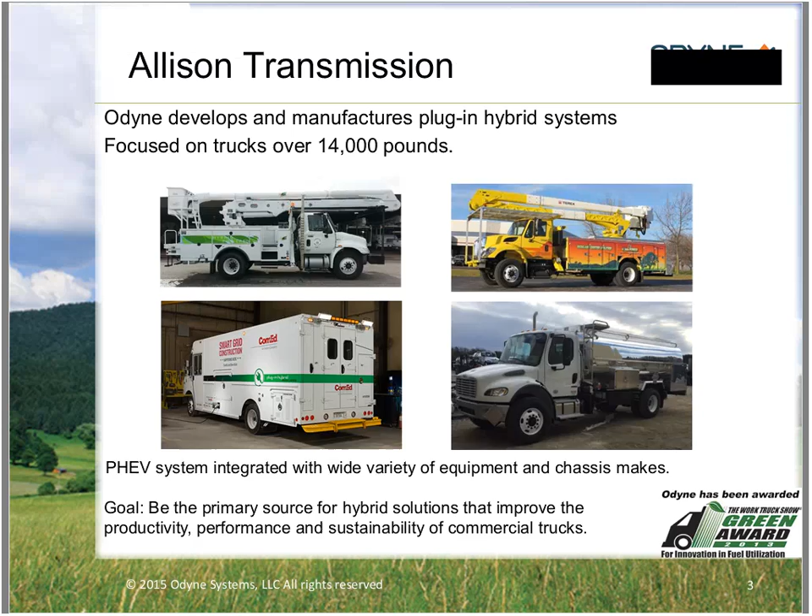Odyne Systems has a partnership with Allison Transmission. Allison Transmission is the world's largest manufacturer of fully automatic transmissions for medium and heavy-duty commercial vehicles. So those who are familiar with them, all the fully automatic transmissions in commercial work vehicles are very familiar with Allison. They partially own Odyne through a non-controlling equity investment, and we integrate our plug-in hybrid solution with the existing powertrains through a very minimally intrusive design that I'll go over with you today. With Allison, we do have a collaboration with them on engineering and marketing to work together to develop these products, and we are exclusively approved by Allison Transmission to globally provide the plug-in hybrid solution on their 1000, 2000, 3000, and 4000 series transmissions.

This slide here just shows the Odyne design with our minimally intrusive setup. So what you're looking at is an Allison transmission towards the left of the slide with our plug-in hybrid solution mounted from the power takeoff. So that Allison transmission we take from a commercial vehicle and integrate into the existing platform. From the power takeoff, we provide an electric motor, which is a traction motor, the Remy HVH250, which provides launch assist and regenerative braking while driving to improve the fuel economy of that vehicle.

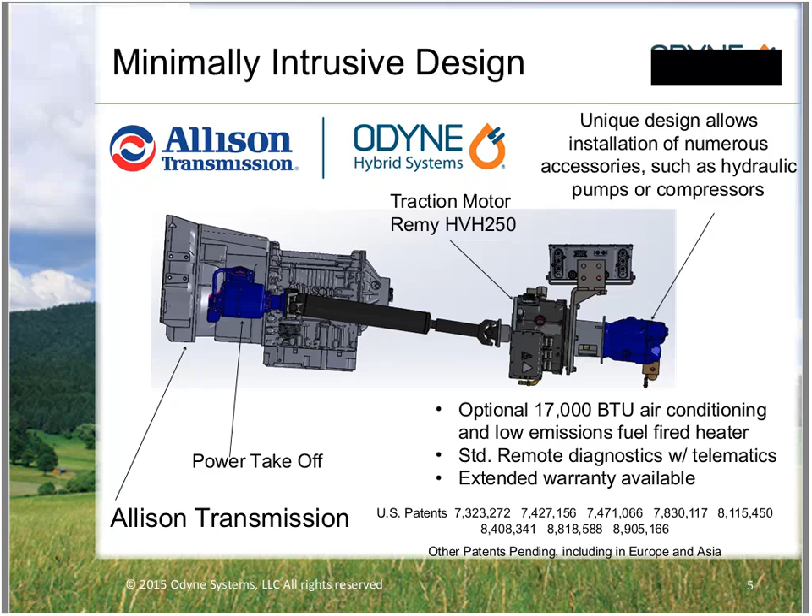This is showing the Odyne manufacturing process. We are an intermediate stage manufacturer, and here are a couple of pictures of our assembly facility. We'll take an OEM chassis, whether it's a Ford, Freightliner, Freightliner custom chassis, or Kenworth International platform, and integrate our plug-in hybrid solution to that vehicle.

With our platform, we'll take that existing chassis and integrate the components you see on the slide, adding either a single battery pack option or a dual battery pack. The single battery pack is a 14.4 kilowatt-hour solution that adds 1,200 pounds to the vehicle. The larger two battery pack solution provides 28.8 kilowatt-hours and adds 1,800 pounds. This vehicle at our manufacturing facility is upgraded and integrated.

You can see the picture there. At this one facility, we installed over 120 systems in 2014, and it's very scalable so we can do this around the country. We have facilities in Wisconsin and California currently that do the system upgrades for us, and we're looking to expand as the volume dictates.

Again, you can manufacture or add these to a wide choice of chassis and engines. We work with different chassis OEMs that interface with the Allison transmission, and also multiple engine platforms from Cummins, Navistar, MaxxForce, and Detroit Diesel.

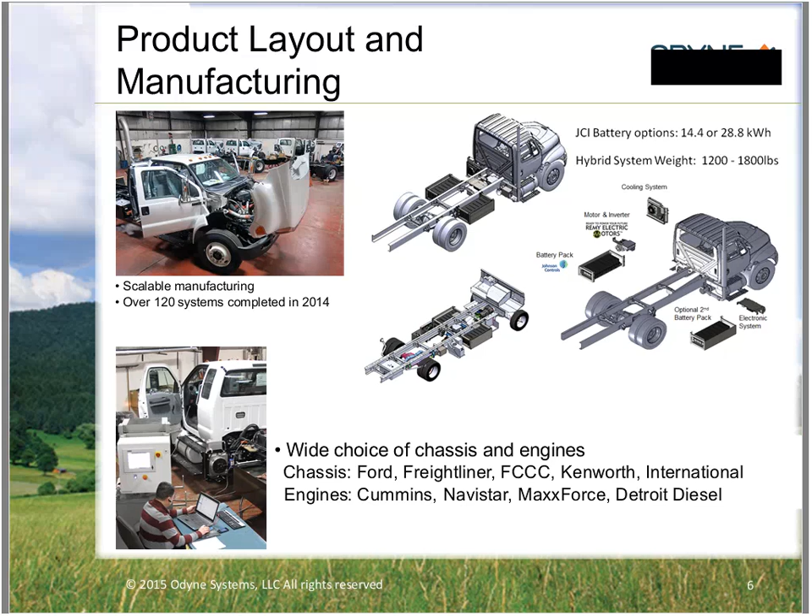Odyne is one of the leaders in plug-in hybrid systems for the commercial truck market around North America. We've been fortunate to receive multiple awards and projects over the last couple of years, the largest being a DOE and EPRI program where we deployed approximately 120 vehicles around the country and into Canada with our plug-in hybrid solution.

We also received programs in California from the California Energy Commission, two different programs, and one program partner is Pacific Gas and Electric. They are just receiving their first two Odyne plug-in hybrid systems on digger derrick applications, which will be deployed this month into their fleet to see those fuel savings firsthand.

We've also worked with the South Coast Air Quality Management District in the Los Angeles area for two projects, and with the DOD for deployment of a plug-in hybrid vehicle at Pearl Harbor. So you can see we've been able to deploy our technology throughout North America.

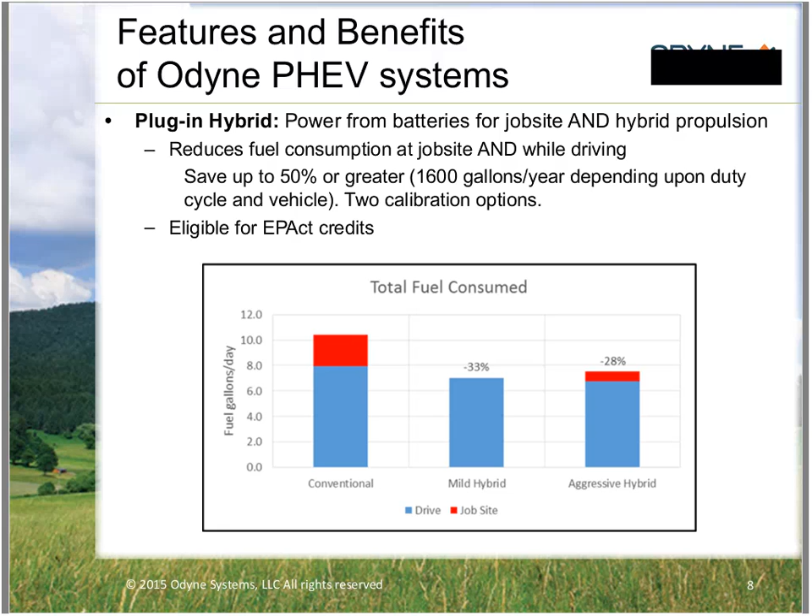This next slide shows that in addition to fuel savings, we see significantly lower emissions compared to a diesel-powered vehicle when you add the Odyne plug-in hybrid solution. This breaks down the CO2, the THC, and the NOx across different slides showing those benefits.

You can see the CO2 reduction just by consuming less diesel fuel - there's a significant reduction in CO2. But the biggest benefit comes from the NOx and THC. As you can see, the majority of that emissions from our dyno testing was produced at the work site while the vehicle was stationary, and there are significant reductions in both NOx and THC when you integrate an Odyne plug-in hybrid solution.

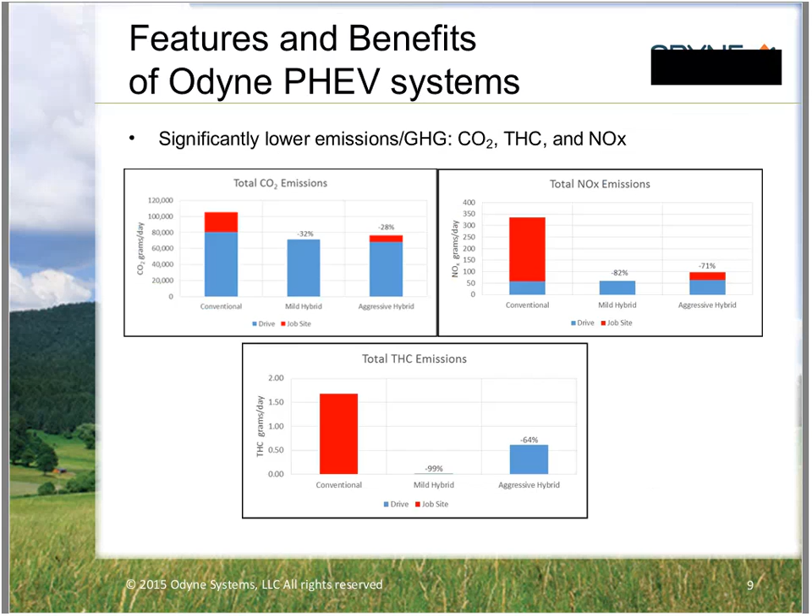Additional features and benefits of the Odyne system: we provide one of the largest battery systems with our application, over 25 kilowatt hours of usable energy, which provides a nice quiet work site and keeps the engine off longer than a smaller battery pack option. This all-electric work site also reduces engine maintenance due to lower idle time, so less wear and tear on the engine, less frequent oil changes, and other benefits of not having to idle the truck for that extended period at the work site.

Our battery packs are built for extreme conditions. As you saw from that map, we have vehicles into Canada and down into Arizona in real warm climates, and they are built for those extreme conditions. They are thermally managed, liquid cooled and heated, and IP67 rated, so they're submersible and built for an automotive, real truck environment. Those battery packs have a 4-year warranty direct from Johnson Controls, and are designed to last 10 years.

We also provide one of the largest electric motors, with 42 kilowatts of continuous power, 70 kW peak, which provides much better acceleration and can power much larger loads, like digger derricks that we were doing for Pacific Gas and Electric to be able to power and dig those holes fully electric.

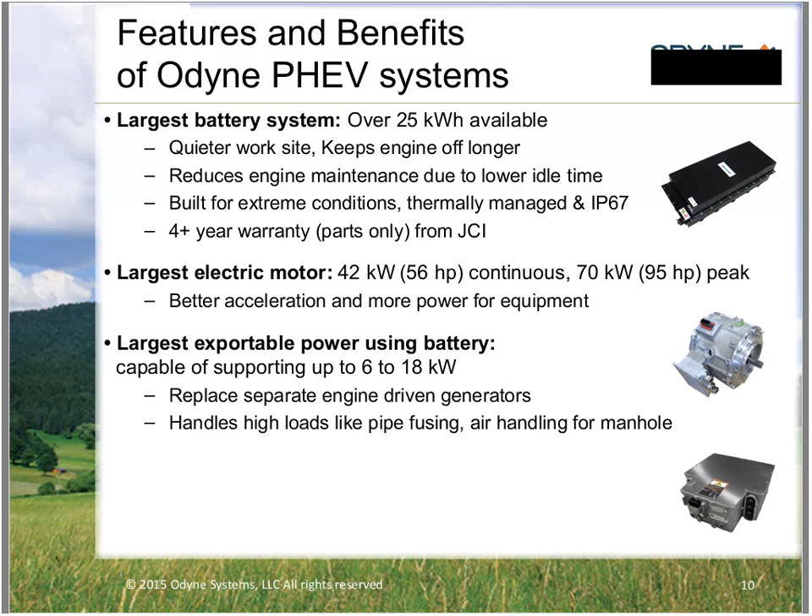We also offer one of the largest exportable power solutions available, varying anywhere from 6 to 18 kilowatts. That would replace a separate diesel generator that you'd have on your vehicle, providing a nice solution where you don't have to bring along a diesel generator, and provides additional fuel savings without having that generator on board.

For the work trucks here, I want to go through a couple examples of what we provide and the solutions we're seeing in the field. You can see there's a wide variety of applications we've deployed, from bucket trucks working with Altec, Terex, Versalift, used to maintain overhead lines, to cranes and digger derrick applications for installing poles and transformers and heavy lifting, and underground utility vehicle applications like that hybrid walk-in van and compressor truck, which provide underground infrastructure maintenance for electrical and natural gas lines.

Our newest application is a fuel tank truck for Duke Energy, which will actually deliver diesel and gasoline fuel to vehicles and do that fully electric at the work site instead of being powered by the diesel engine.

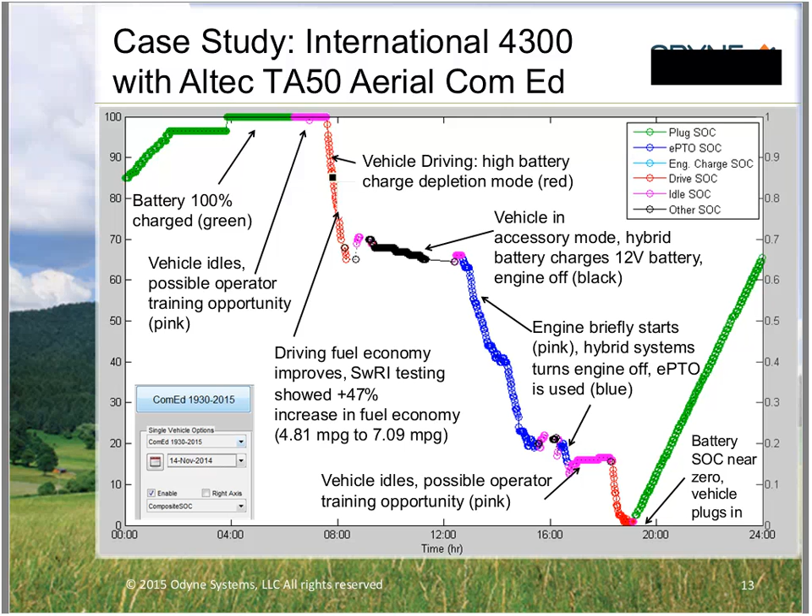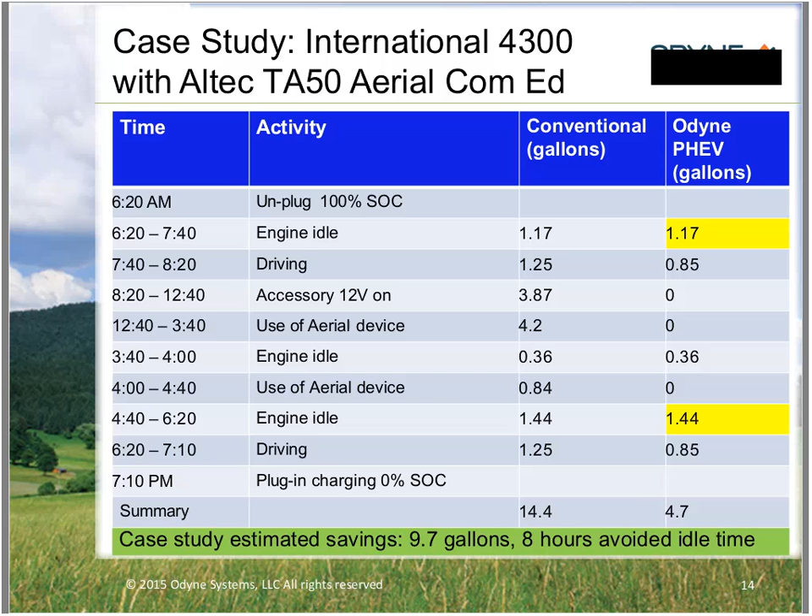That's just one day, one example of a bucket truck application. What that correlates to is this chart showing a conventional diesel-powered vehicle equivalent versus an Odyne plug-in hybrid vehicle, and the amount of fuel consumed with our plug-in hybrid system versus a diesel-powered vehicle. You can see there's almost 10 gallons of savings and 8 hours of avoided idle time just for that one day of operation. I have one more example I want to show you quickly.

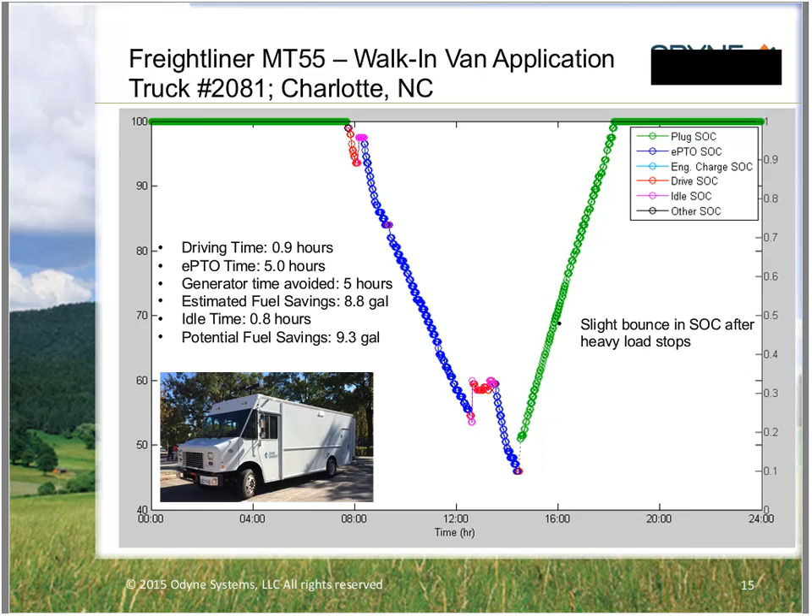So just in summary, the Odyne solution reduces fuel consumption, lowers emissions, improves the vehicle performance, provides a nice quiet work site for the crews, and lower operating and engine maintenance cost.

The plug-in Odyne solution is defined as a true plug-in hybrid solution by the U.S. government and is eligible for EPAct credits. It uses all the current safety criteria from the SAE standard plug-in charging and high voltage interlock loop. It uses the same charge station that a Chevy Volt or Nissan Leaf uses, and has a nice warranty acknowledged by Allison Transmission, and a nice battery warranty of over 4 years.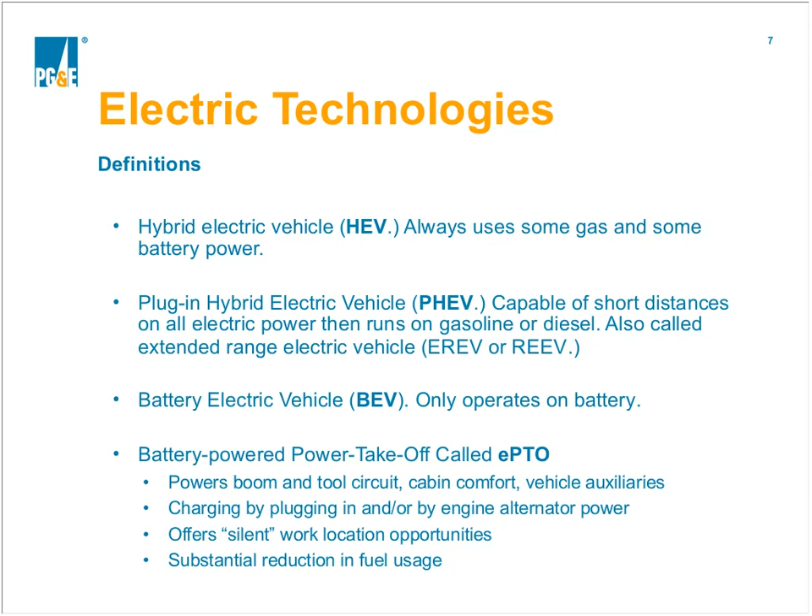One of the most important factors, unique to the utility sector, is that our linemen and troublemen who go out every day operating in and around large cities and neighborhoods can work silently to replace transformers and intermediate circuits, which provides a substantial safety factor. Normally they communicate with hand-arm signals due to loud, idling diesel engines, but now, in an electric ePTO kind of environment, they can talk just as normally as I'm talking to you today. This affords a great safety factor when dealing with large amounts of electricity while making repairs for the customer.

So why electrification, and why is the time now? There are obvious reasons and not-so-obvious reasons, and everyone who joins the electrification effort does it for different reasons—whether it's national security, transfer of wealth, or reducing the money we send overseas, maybe a trillion dollars each year, to foreign lands that may or may not like our way of life. Either way, there are a lot of reasons why we think the time is now.

From a financial standpoint, the compound annual growth rate for fuel, in terms of volatility, is about 7.5% over 15 years. Many of you probably remember that about two months ago, everyone enjoyed filling up their gas tanks for $2.50 or less per gallon at Costco or the local cheapest option. But now, at the nearest gas station, prices have jumped up considerably in just the past couple of months. That volatility is ever-present, and it's a clear example of why the time is now.

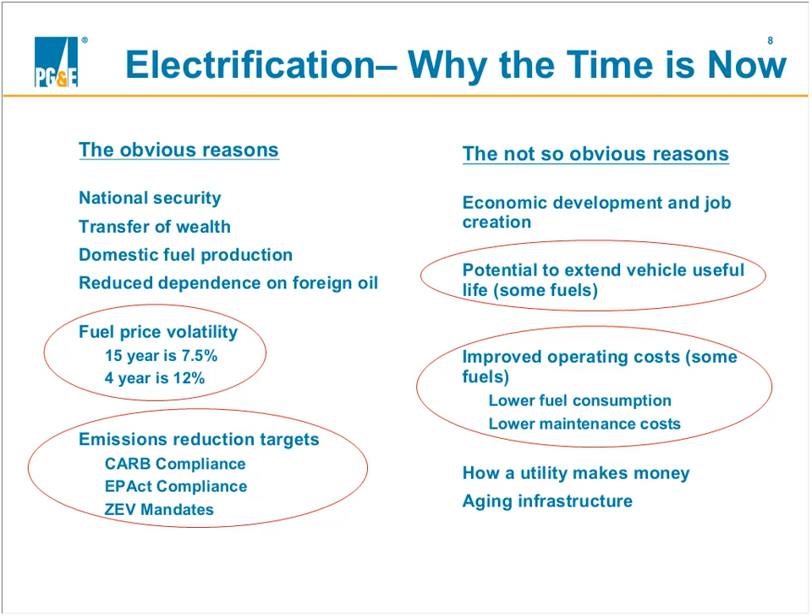Whether it's emission reduction targets, EPAct compliance requirements, replacing gasoline to reduce emissions, or fuel prices themselves, some of those benefits are illustrated in the lower left-hand corner of the slide—we've touched on some of those already. The operating costs shown in the upper right relate to idle reduction, which we discussed, along with some of the safety benefits from reducing noise in and around large cities and urban areas. As for useful life, we've shown about 3 years of additional useful life for vehicles embedded with alternative fuel technology.

And also the leadership role of just getting out there—whether you believe in global warming or not, for every scientist that says it's true, there's someone who disagrees. But in either case, I think many would agree it's the right thing to do, rather than run the risk of being wrong. One option is to lead the way and do the right thing, and that certainly comes into some of our decision-making processes.